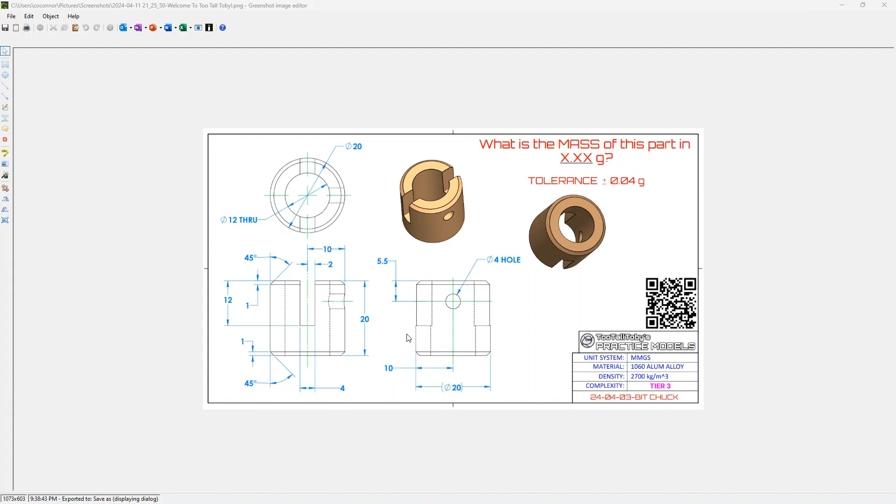We don't have to do any sketches at all. We just use our standard drag and drop shapes to build this model. So here's the dimensions for reference. I'll move it over and we'll build it here in IronCAD.

Using our drag and drop techniques, we can just drag and drop a cylinder to build this model. This is our original cylinder. We know the diameter is 20 and it's got a height of 20 as well, so we can just type in those two values to get started.

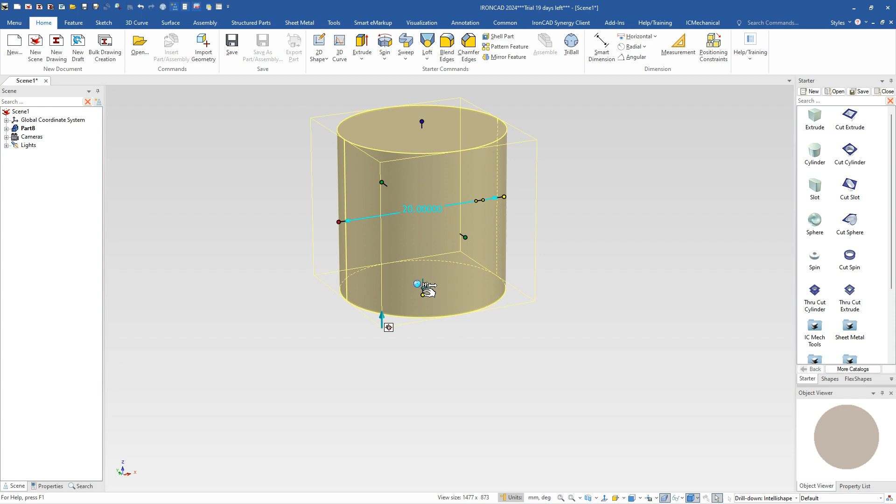We know the top and bottom have a chamfer, and these are easy to do. We select our top and bottom edge, right click and go to chamfer. We're going to do a distance angle on this - select distance, and distance is going to be 1, and our angle is going to be 45. You can see which way it's going.

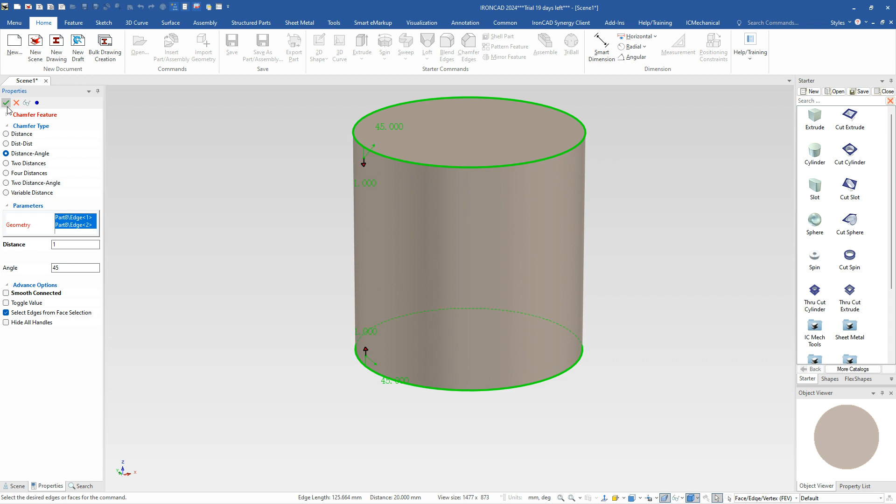Right now it's going in 1 and then angled this way, which will work since it's actually a 45. But you can also toggle these values over - if you wanted to go down 1 and up 45, you can do that as well, just to show you that you can toggle those around by selecting this value. But 45 is the same dimension either way. We'll go ahead and put that chamfer on there, which gives us the base for that.

Next, we have a through cylinder, so we'll go ahead and drop that onto our center, precisely in the center there, and that has a diameter of 12, so that creates that.

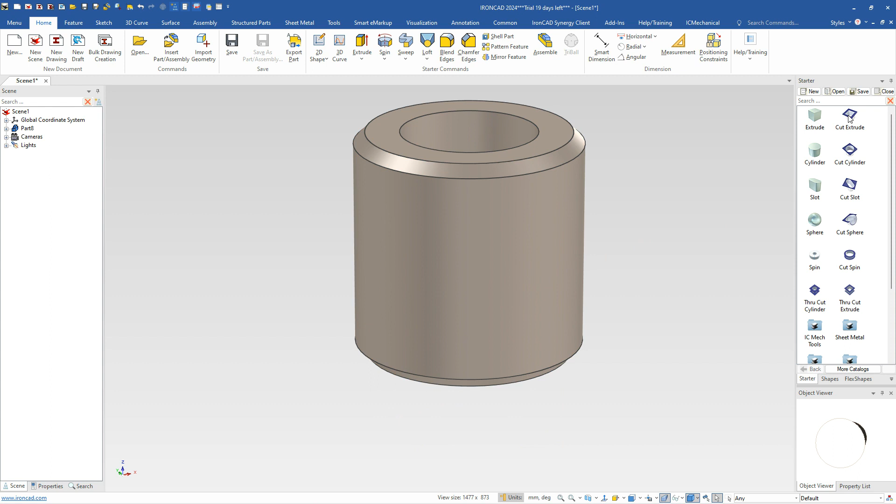Our next shape is our cutout that goes through here. To do that, we'll use our extrude cut. Again, we'll precisely drop it into the center of this, and we can use our handles to symmetrically size. We're going to right-click and drag this out to cut through this, and set the value of that cutout to be 4.

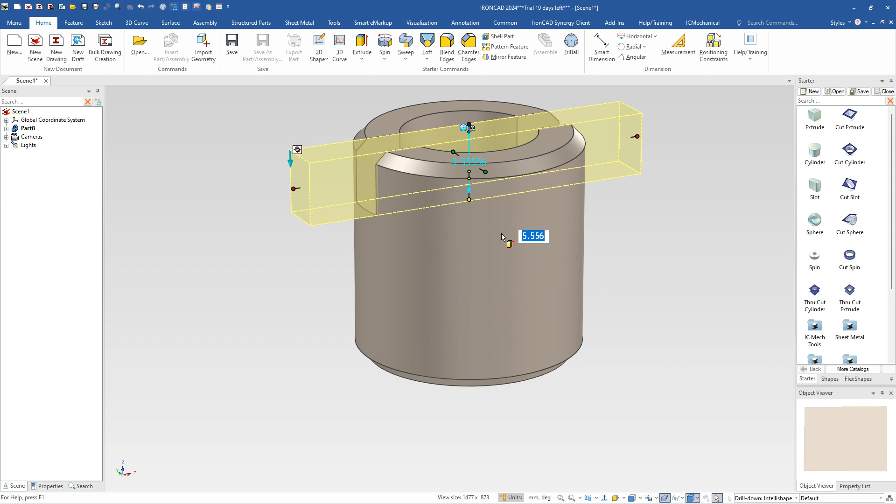For the width of that, the depth, which is already the handle highlighted here, is from the top face down 12 millimeters. So that basically gives us that shape there, and that's all it takes for that.

The last one we need to do is our hole. Again, we just drop our cylinder here. The easiest way to do this is drop it in the center, and it's going to point up. We're just going to use our tri-ball - I've shown this in some other videos. You can just lock an axis, rotate, type in 90, or grab one of these handles that you want to be perpendicular to this, and get your hole to rotate 90 degrees automatically like that.

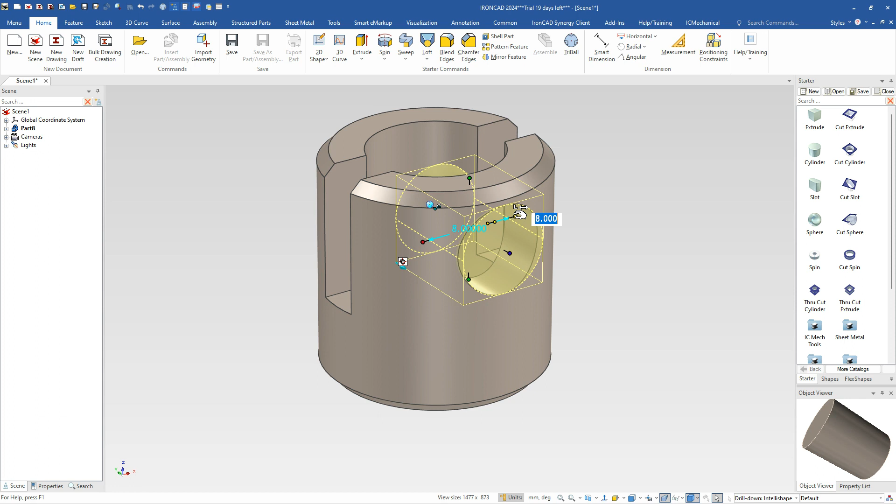That's an easy way to do that, and we're going to position this down while I'm here. I've got our tri-ball on, just hitting F10 to turn that on and off, and that hole needs to be down 5.5 millimeters, with a diameter of 4. So again, this hole only goes through half of this model, that's all you have to look out for on this, but other than that nothing too tricky on this model.

Very easy to build in IronCAD, very quick, no sketches for us to build on this model, so fairly easy to do. If we want to get our density on this, we can go over here, type in to get our mass. Our density is 2700, and we'll tab out of that - that gives us the mass on this guy, 9.5 for this model.

Hopefully that helps give you guys some ideas on this. It's 9.52 to be precise, if they go into the tolerance range for that, but that's all it takes to build this model. Hopefully you enjoyed this - again, no sketches, simple chamfers and cylinders for IronCAD and a cutout. Very easy. Hopefully you enjoyed it. Thanks again.